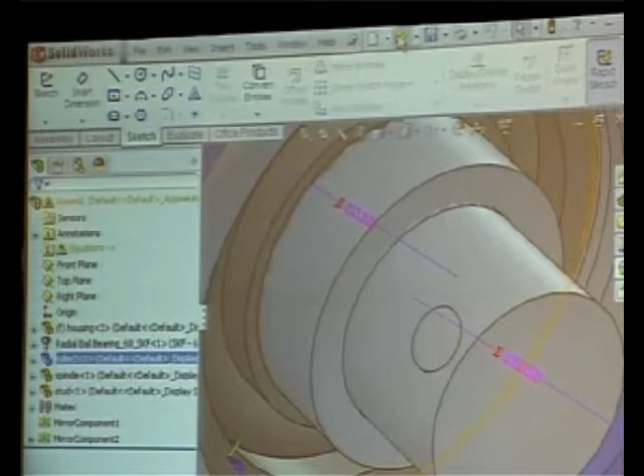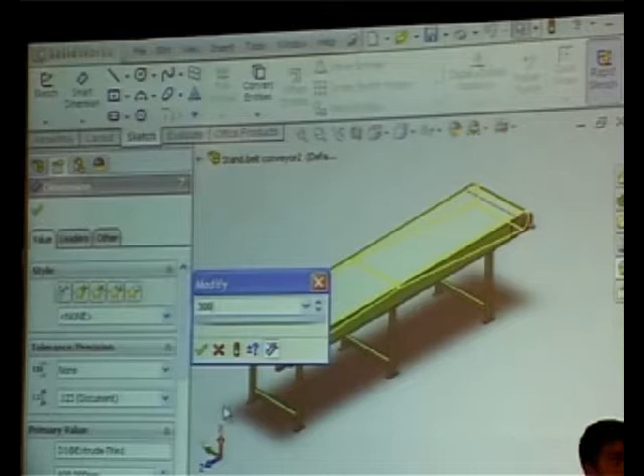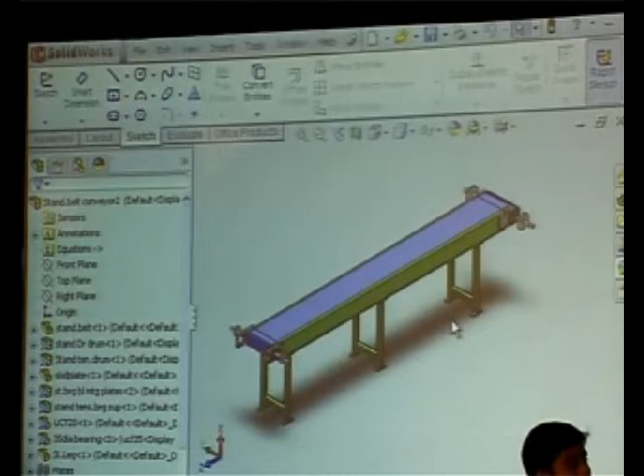I'll just show some drawings. I have another assembly drawing of a belt conveyor. In this belt conveyor, this particular width I think is 600 mm. If we change it to 300 mm, the conveyor width has changed, and I can see that there's something wrong somewhere. Oh no, the sprockets, everything - I think the mirror only, the sprocket should have been on only one side. Anyway, there's this thing, but like this we can change the length.

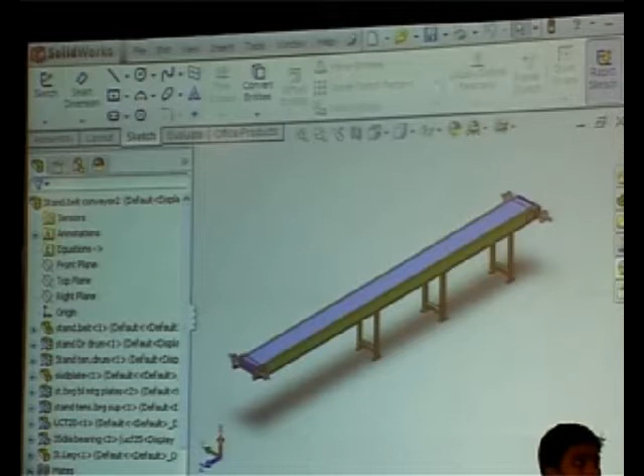Of course, two legs are missing. You can alter the pattern and increase the number of legs. So this is the way we modify, and this has definitely helped us in a great way in our design.

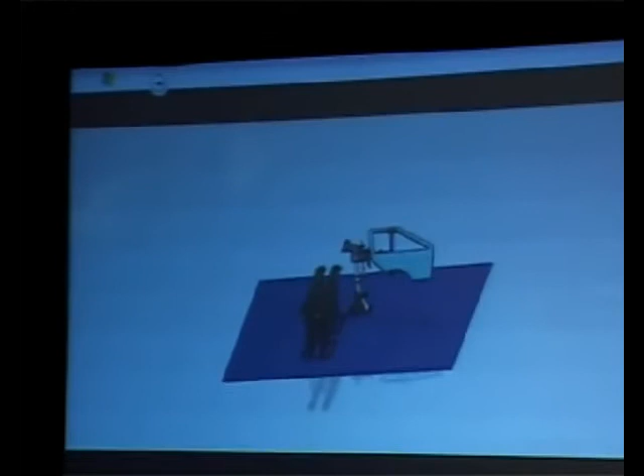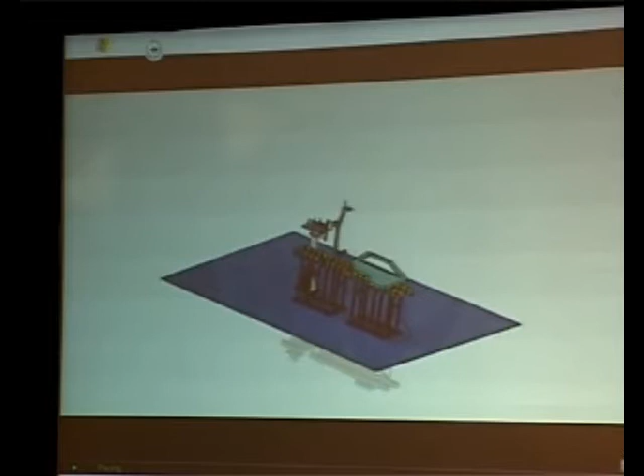Now I'll just show some animations that we have made. Some of them have become orders, some are in the process of becoming orders, and some, without any reason, possibly have been dropped by our customers. Anyway, this is one we are still trying to make for Ashok Leyland. There, the door assemblies are being loaded onto a press, and now it is being done manually. It's a new press, almost commissioned, maybe commissioned about a month back.

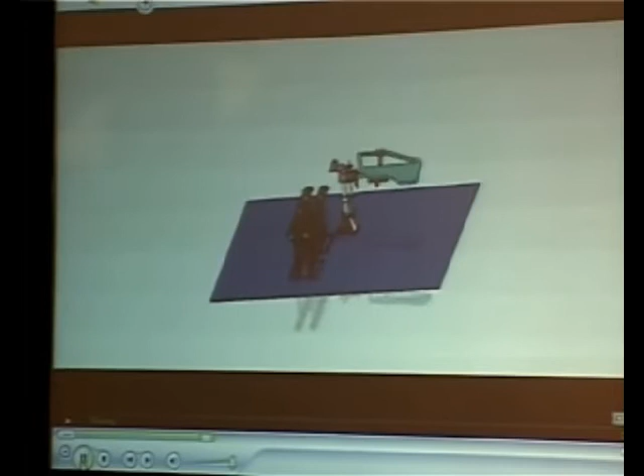That's one item. Just pause it, please. You can see what they want is to take it out of a trolley and hang it on a manipulator. That manipulator will swing, make it horizontal, and load it onto a conveyor. The conveyor runs and loads it onto the press. We have not made the drawing for the press itself because we didn't want to. So this is how we go about our design.

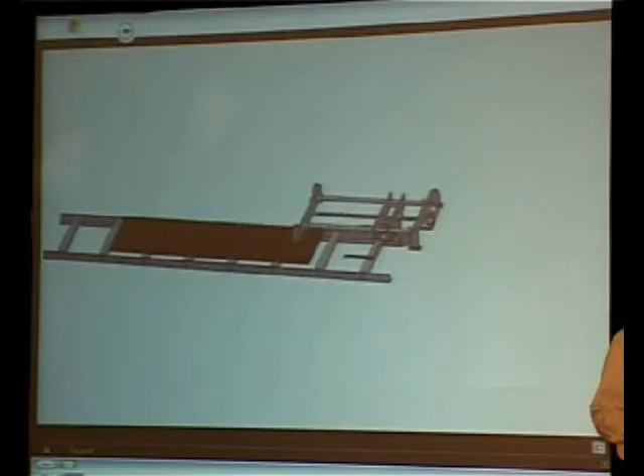And my friend told me, what we can say with a thousand words can be shown in a picture. And in an animation, how it works - if you try to explain it, it will not work.

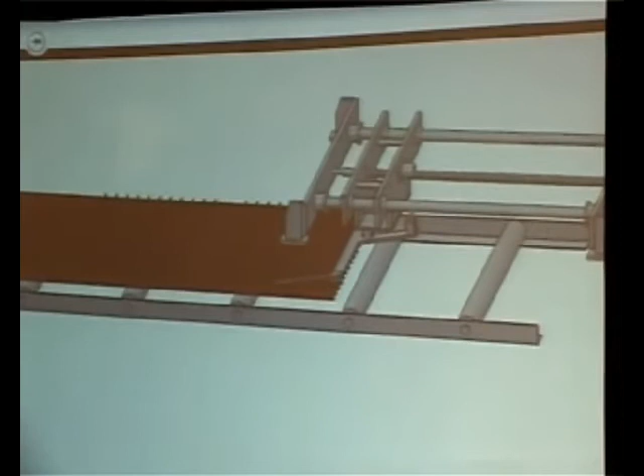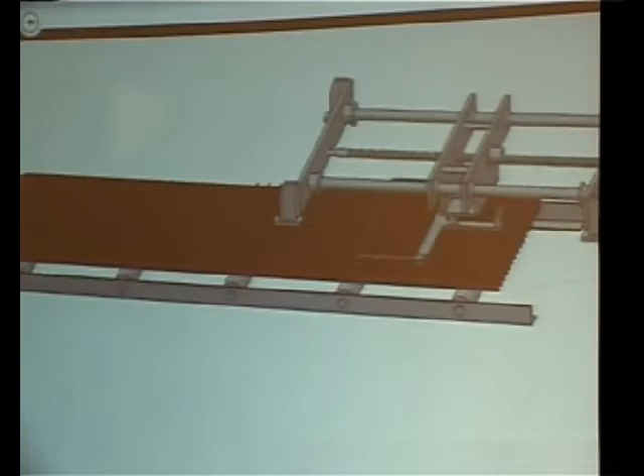So this is an equipment we have made for a company called Gulfan Industries, where they make these gratings used on huge platforms, on which people walk. There will be flats, longitudinal flats and cross rods. These cross rods, after welding, will have to be moved one after another. It will move, then again another rod will be placed, welded, and again it will move. Like that, the process will go.

This we have delivered today. I had asked them that yesterday it was tested and found working satisfactorily, and we are delivering it.

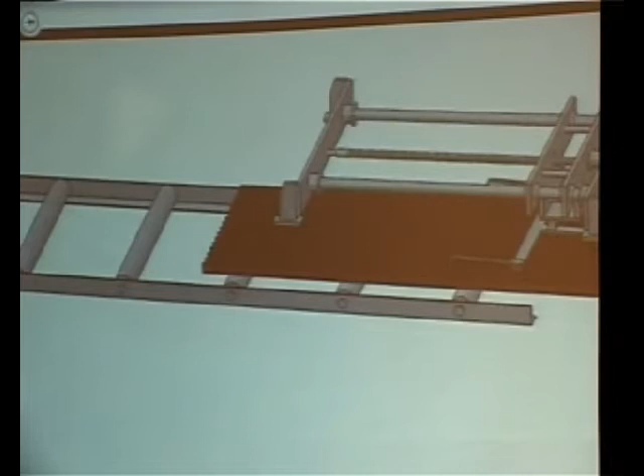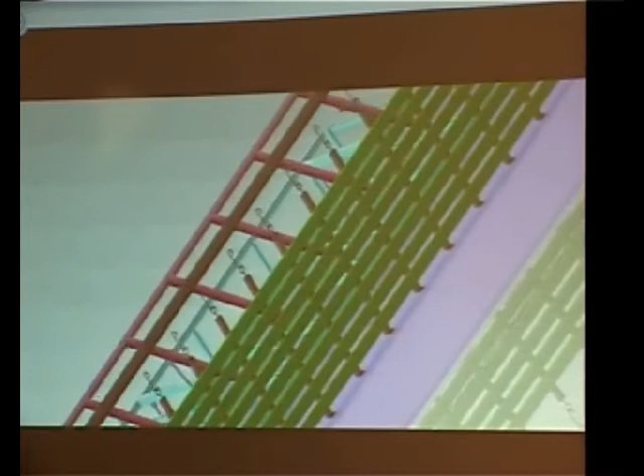So though we are in the field of conveyors, our specialty is in making special equipment. This is an equipment we designed for Schwing Stetter, for loading an overhead conveyor with some structures. Complete details are difficult to explain, but the frame with the material is placed on a trolley. The trolley goes forward, tilts, and the hangers on the hooks on the conveyor get aligned with the hooks on this frame, and it gets loaded, gets tilted, and gets back.

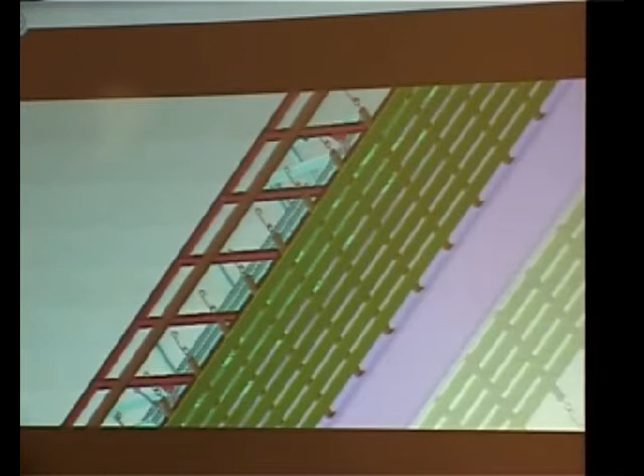We can show it again, but time is also running out. Just wanted to make it schematic. This is what it is.

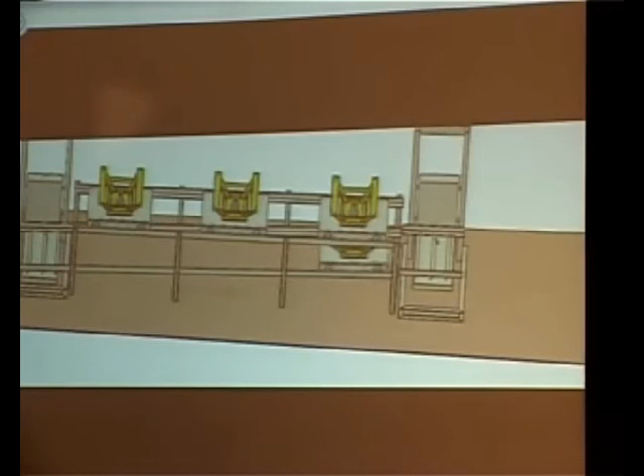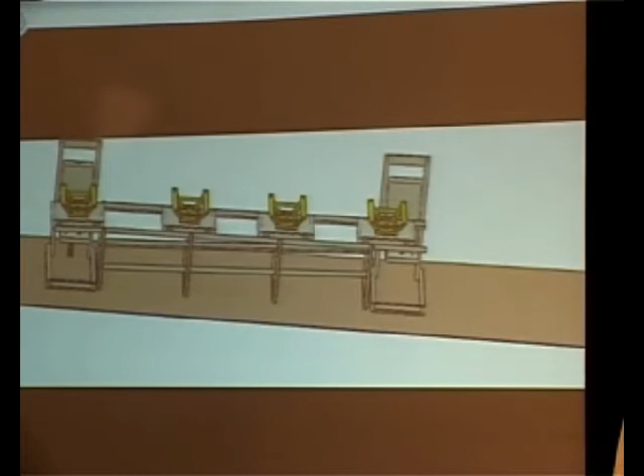This is an equipment we made for ESAB India, and it is successfully working. They were using these fixtures for assembling the welding machines. Now we have supplied a lifter-lowering arrangement, and with this setup, these fixtures, after assembly testing and unloading of the assembled transformers or welding machines, it comes back and rotates in a cycle. Like that we have designed, and we have made all this.

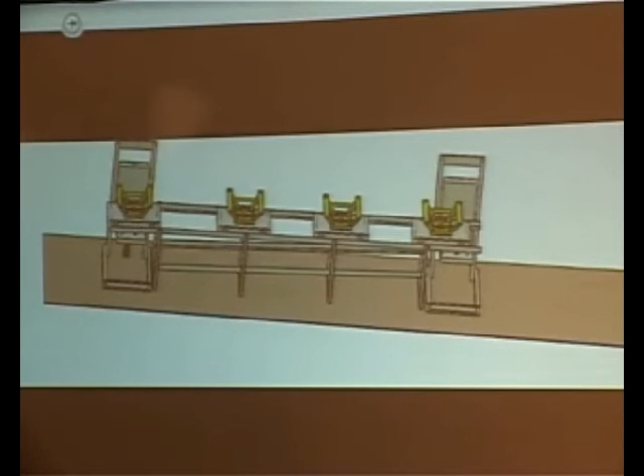But for SolidWorks, I don't think we can really design and be sure of the performance beforehand. So these are all some of the animations we have made.

Of course, there are plenty. You are all not interested in the numbers. It is the quality that matters.

I have explained how we are managing to do our design, and as I told you, it's easy to learn and interesting to work with. All this I don't have to repeat. We use SolidWorks, and I am definitely happy about SolidWorks, and I am planning to buy another license for a tiny company like ours. It's something I don't have to speak anything more about. So, yes, SolidWorks is a good tool for designing, and I would recommend it.